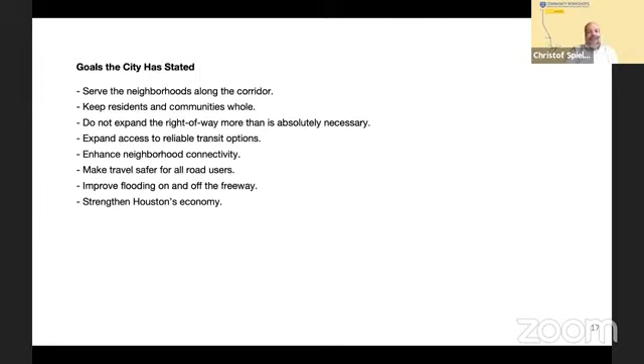The county adopted a very similar set of goals with a resolution at Commissioners Court: enhance walking and biking connections between and within existing communities, improving safety for people in vehicles walking and biking on the facility and connecting streets, reduce historic flooding patterns, aggressively mitigate new flooding impacts, prioritize use of existing right-of-way, mitigate displacing residents and business owners by compensating their properties at fair market value, and help renters with rental relocation assistance. Preserve existing businesses and community resources while enhancing growth and economic development opportunities within neighborhoods adjacent to the project.

Protect and enhance parks, open spaces, and air quality as critical to the physical and mental well-being of individuals, families, and communities. Meet the standards the flood control district has set forth and follow the requirements of Atlas 14. Encourage an engineering design for an innovative multimodal transportation system, and mitigate damage to air quality and alleviate noise pollution as much as possible.

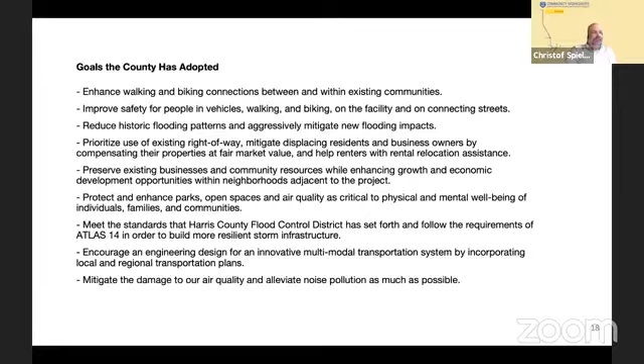Our goal in this entire design effort—in that first round of meetings where we heard concerns and opportunities, in the work our team did to come up with design responses, and in the alternatives we presented to the community in the second round of meetings—was to reduce the negative impacts and increase the benefits of this project.

We've identified a whole series of ways to do that: dedicated two-way transit lanes, frontage roads designed as city streets, safe pedestrian and bike crossings while keeping as many of those crossings as possible, opportunities for freight rail grade separation and relocation, flood mitigation on Halls Bayou and White Oak Bayou, programs for displaced residents to ensure the affordable housing supply is not reduced, and design exceptions to reduce displacement.

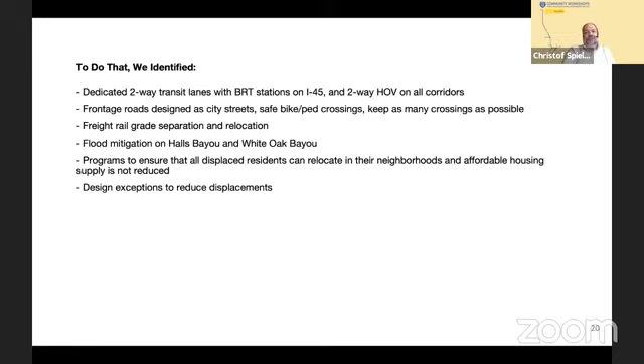Having done all of that, we set out to reduce those impacts and increase those benefits. We concluded that we could not do that simply by refining the project. If you look at the draft environmental impact statement, it stated that all alternatives would cause disproportionate high and adverse impacts to minority or low-income populations, and those are directly a result of the widening of the highway.

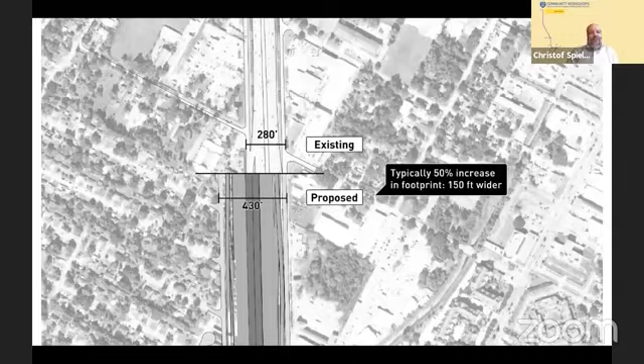This is a project which would significantly widen the freeways that it touches. In segments 1 and 2 north of downtown, there's typically a 50% increase in footprint—that's 150 feet of additional highway width. And that directly leads to significant displacements.

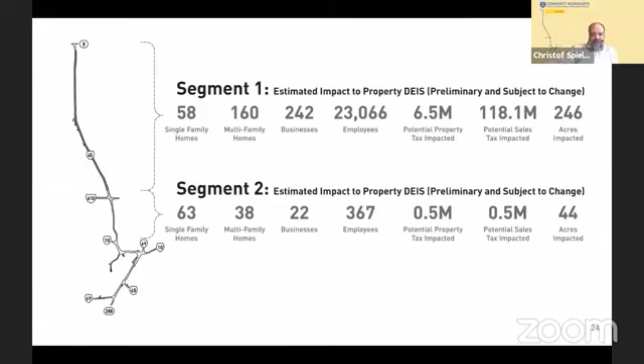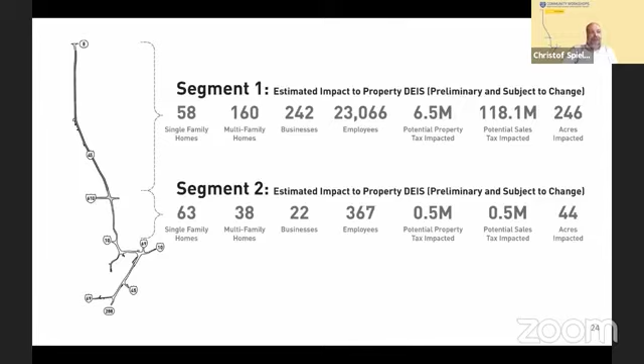These are the DEIS numbers. You can see in segment 1: 58 single family homes, 160 multifamily homes, 242 businesses with a total of 23,000 employees. In segment 2: 63 single family, 38 multifamily, 22 businesses. These are very significant impacts that are due directly to the widening of the highway.

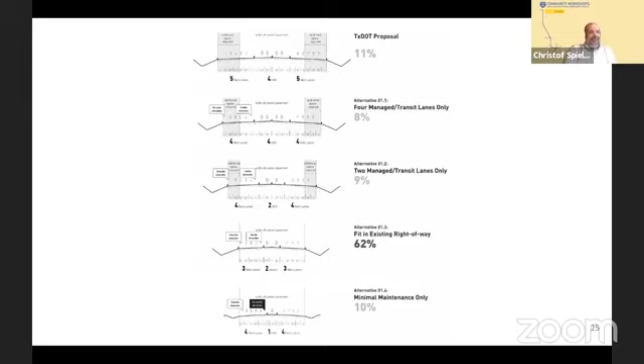In that second round of public meetings, we asked what's your preference for capacity and cross-section. What we heard as an overwhelming response was the public saying they want us to look at alternatives fitting within the existing right-of-way of this highway.

So we looked at multiple options for doing this, and all of them ultimately come down to a trade-off between three significant goals: adding capacity to the highway, bringing the highway up to current design standards, and minimizing displacements and neighborhood impacts.

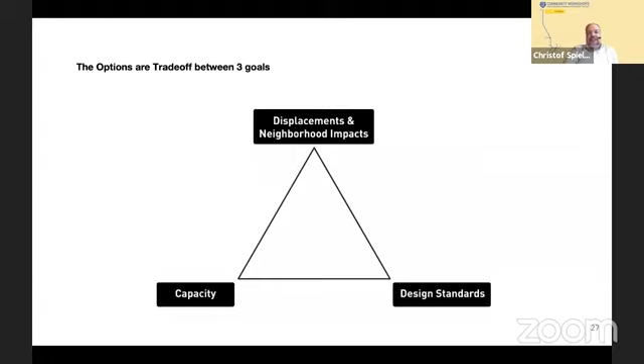If you look at TxDOT's statement of goals, their primary goals are adding capacity and increasing safety, which is taken to mean bringing the project up to current design standards. We came at this saying there is really a third goal here: protecting and enhancing neighborhoods. Based on all of this input, we asked what version of this project does that.

We think there's an alternate vision for segments 1 and 2 that can accomplish all three of these things: increasing the capacity of the highway, increasing safety, and having minimal displacement.

So first of all, how do we increase capacity? First of all, rebuilding interchanges is an increase in capacity. Every time you have a left-hand on or off ramp, every time you have merge lanes which aren't long enough, every one of those serves as a bottleneck on the entire system. So bringing interchanges up to modern standards increases capacity.

Secondly, rebuilding on and off ramps so there are proper merge lanes and good geometry increases capacity. Adding shoulders increases capacity, especially if there's a crash and cars are able to pull over. We know segment 3 serves as a bottleneck for this entire network, so segment 3 can actually help capacity in segments 1 and 2. Adding transit capacity and more transit service adds capacity, and giving more people access to transit adds capacity.

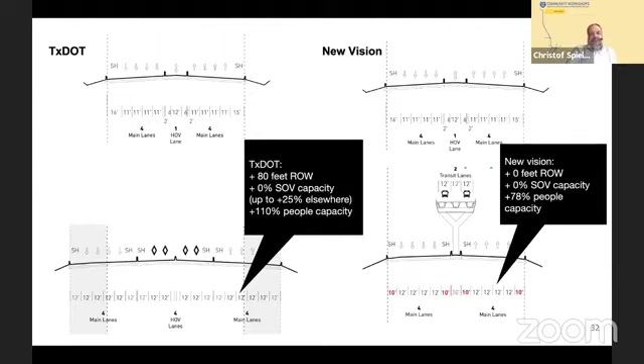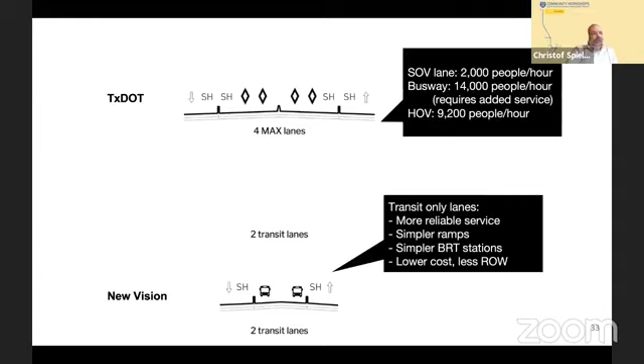Part of that is thinking about those lanes in the middle. We think looking at transit-only lanes, as opposed to HOV lanes or managed lanes, can lead to more reliable transit service and simpler on and off ramps. It makes it simpler to add stations along the way so neighborhoods benefit from that transit, and it can be built at lower cost with less right-of-way.

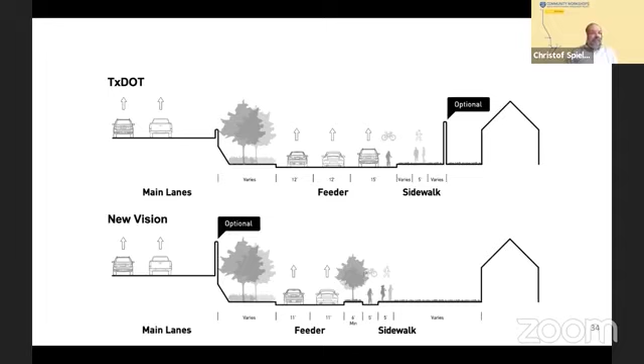But this vision isn't just about what happens with the highway main lanes, it's also what happens next to the highway. We said the frontage roads along I-45 should be seen as parts of the neighborhood rather than parts of the freeway. That means they're designed to city street standards, not highway standards, that they have safe pedestrian and bike facilities, not bike lanes shared with cars, that they have more extensive landscaping, and even that sound walls are located next to the main lanes and between the main lanes and the frontage roads rather than between frontage roads and houses, which clearly makes those frontage roads part of the neighborhood and means fewer gaps in those sound walls, making them more effective.

And so that is the vision that the mayor's letter puts forward: keep the current number of main lanes in segments 1 and 2, replace the current reversible HOV lane with two-way transit lanes, add intermediate BRT stations so neighborhoods along the way benefit from that new transit service and so local bus routes can connect to that BRT, bring exits and interchanges up to design standards, provide full inside and outside shoulders, and have the frontage roads typically be two lanes designed as city streets.

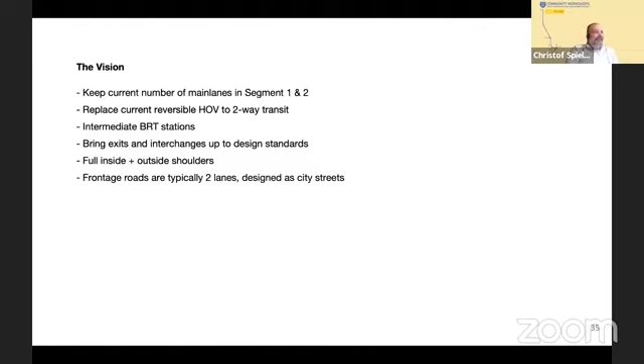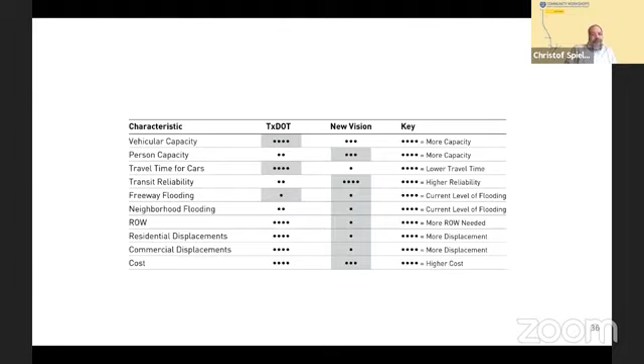So looking at that vision, how does that compare? Ultimately, it does not provide the same vehicular capacity that the TxDOT design does, but ultimately can provide more person capacity. With less vehicular capacity, it may not do as much in terms of travel time for cars, but it does more for transit reliability.

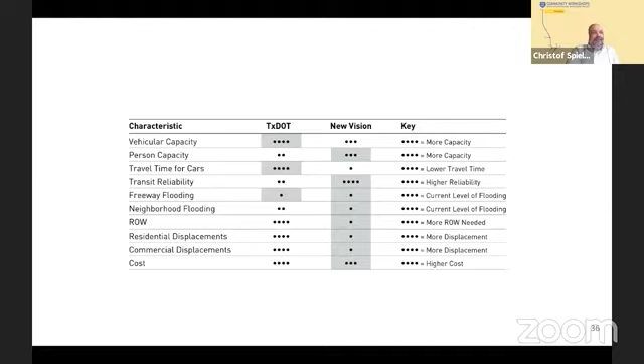Both versions can really address the freeway flooding. We think ultimately widening the freeway less and incorporating more flood control features as part of the highway can mean we reduce neighborhood flooding as well. And clearly, this alternate vision uses less right-of-way, fewer residential displacements, fewer commercial displacements, and ultimately would be a less expensive project to build. If we look at the goals TxDOT started with, we'd argue this actually addresses those goals, though sometimes in different ways.

When we're adding capacity, if we think of capacity in person capacity rather than vehicle capacity, this is actually a way to add capacity. So we think this alternate vision is a project which would be a significant improvement over the current highway, as well as an improvement over what TxDOT has proposed.

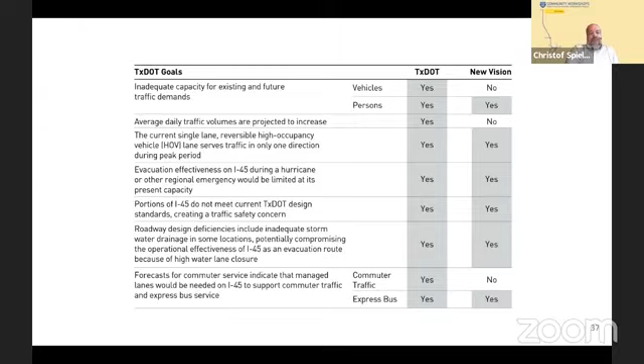All of that leads to the mayor's letter. On May 12th, the mayor sent a letter to the Texas Department of Transportation laying out what I just laid out. Got a response from TxDOT, from Laura Ryan at the Texas Transportation Commission, within 8 days. And then notably, the county chimed in and Commissioners Court passed a resolution saying they agree with the requests made in the mayor's letter.

That letter includes general statements. It includes specific improvements in segments 3. And in segments 1 and 2, it includes a request for a study of an alternate lane configuration, as well as specific improvements. What's in this letter is directly based on what we heard from you.

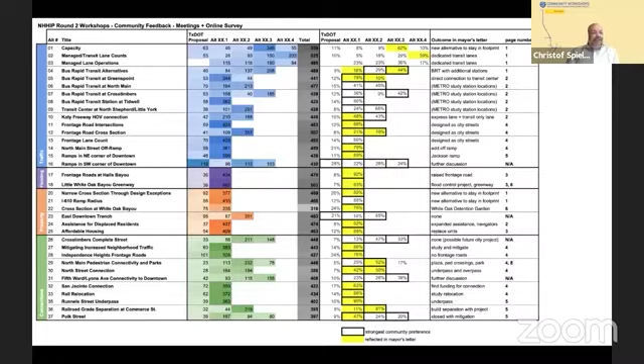For example, you'll see item number 16. We did not get a clear, resounding direction either way, and so some of those need more work. But overall, we were able to take what the public said and say, this becomes the city's vision.

So, general statements: this project should be part of a regional strategy for freight movement that supports the regional economy while minimizing impacts on neighborhoods. Freight is an important part of what this highway does, and we think this should fit into a larger strategy.

This project must leave residents and communities whole. That means ensuring all displaced residents can relocate in their neighborhoods and affordable housing supply is not reduced. That last point is critically important.

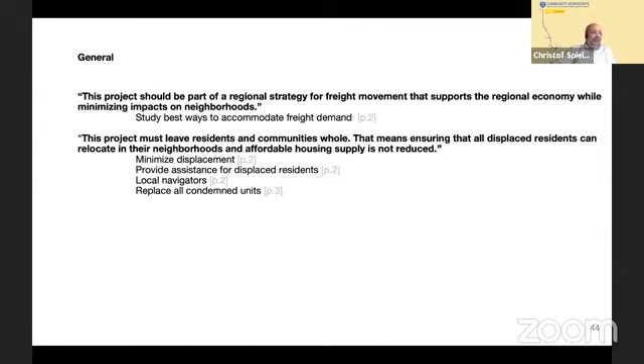This isn't just about making sure that displaced residents have a place to move to. This is making sure that the supply of affordable housing in the neighborhood surrounding the freeway isn't decreased, because if it is, everybody in those neighborhoods suffers from less supply.

This project must not only reduce the incidence of flooding on the freeway, but also reduce the flood risk in the surrounding neighborhoods. There has been some very good work on this by the Flood Control District working with TxDOT.

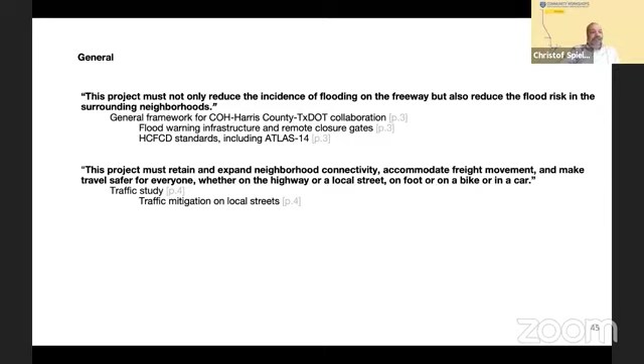This project must retain and expand neighborhood connectivity, accommodate freight movement, and make travel safer for everyone, whether on a highway or a local street, on foot, on a bike, or in a car. This is a transportation project for everyone that affects every mode of transportation.

The project should minimize impacts on parks, facilitate the creation of new green space, and the design of the project should recognize the history and character of the surrounding neighborhoods.

We should find every way we can to reduce and mitigate the significant air quality impacts that highways have regionally and on the neighborhoods surrounding them.

And design coordination statements: the city asked for design-bid-build on segments 1 and 2 to enable more control over the details of the design, continued coordination between the city, Metro, management districts, and a series of asks about construction.

This is a project that will be under construction for over 10 years, and so what life in the city is like during construction is also essentially important here.

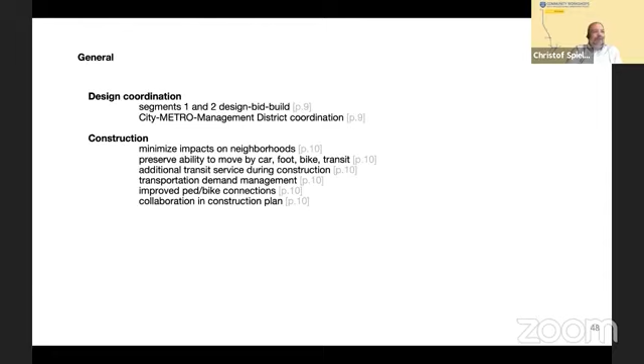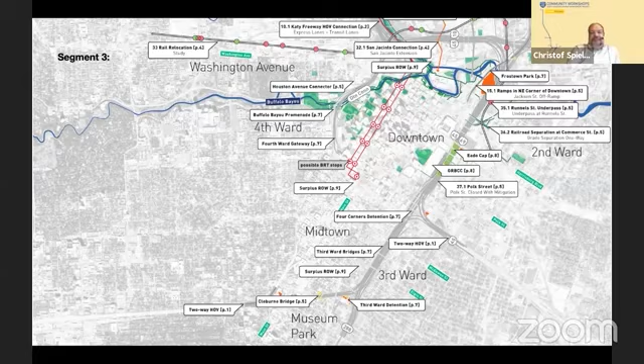We then had a series of specific design proposals starting in segment 3: two-way HOV on the Southwest Freeway, a better bridge for Cleburne, better design for detention in the 3rd Ward, improved bridges in the 3rd Ward, two-way HOV on the Gulf Freeway, mitigation for the closure of Polk, a cap park in Eado, accommodating railroad grade separation at Commerce Street, an underpass for Runnels, better ramp configuration in the northeast corner of downtown, better exits to the 5th Ward, a connection for San Jacinto, and the Katy Freeway HOV connection.

There are still unresolved issues here. We think that at White Oak Bayou, where there are significant impacts on the White Oak Bayou Greenway, there are design refinements which are possible, and we've been working through those.

And on the southwest corner of downtown, the ramps, as currently designed by TxDOT, do not work well for Metro, and we want to see what the alternatives might be there.

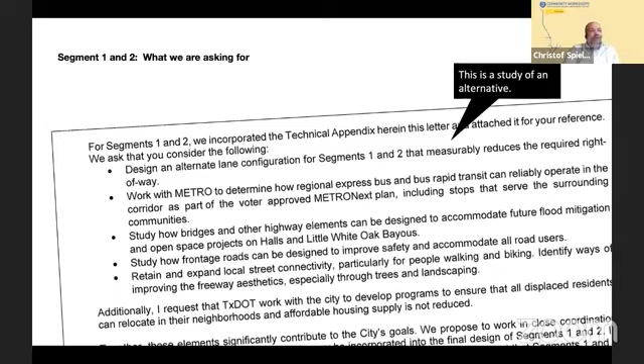In segments 1 and 2, what the letter asks for is the study of an alternative. In other words, the city and the county are not saying we know the right answer for 1 and 2. What the city and county are saying is we believe there is an alternate approach for 1 and 2, and we would like a process to study those approaches.

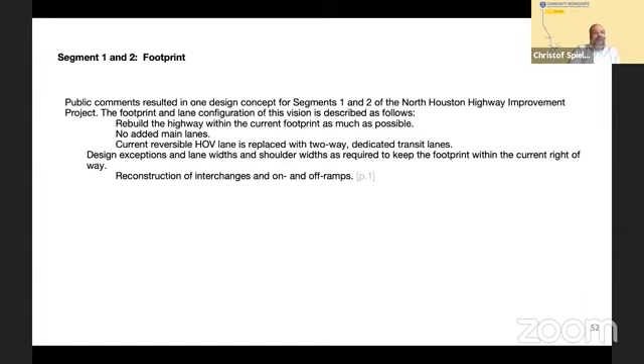That would be an alternative to rebuild the highway within the current footprint as much as possible, with no added main lanes, replacing the current reversible HOV with two-way dedicated transit lanes, design exceptions for lane widths and shoulder widths as required to keep the footprint within the current right-of-way, and reconstruction of interchanges and on and off ramps.

And so that sets up a study, and that study would include a confirmation of goals. We want to start this by making sure we're all agreed upon what our goals are, the development of a new alternative along with any other alternatives that TxDOT may identify, and traffic modeling for the new alternative with agreement on the parameters for that traffic modeling.

As we've discussed already, we think we know what an alternative like this might look like, but we believe there is detailed design necessary in order to get to that point.

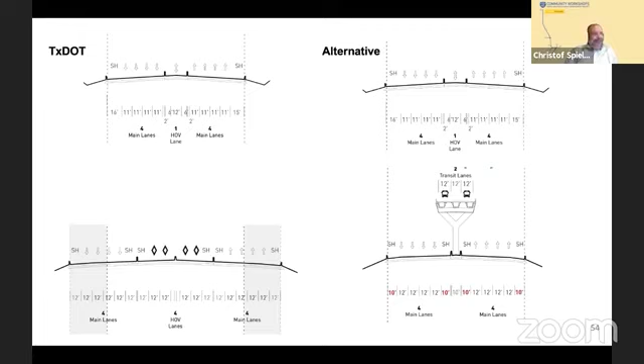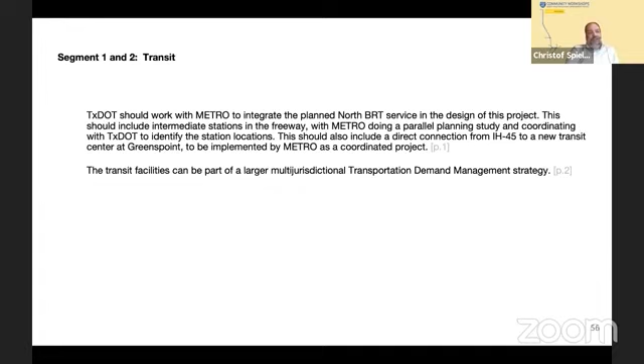This project should expand transit options. That means two-way all-day transit service, and we believe that's best done with dedicated transit lanes that can be used by the BRT as well as regional express service. That means that this BRT should be incorporated in the design of the project, and it should include intermediate stations, with Metro doing a planning study to identify the correct locations for those stations.

Ultimately what this project should enable is a bus rapid transit line that runs from downtown via North Shepherd and Greenspoint to Intercontinental Airport, a much improved version of the current 102 bus. And we think that there are locations for additional stops along the way, which could serve the surrounding neighborhoods and connect to the local bus network.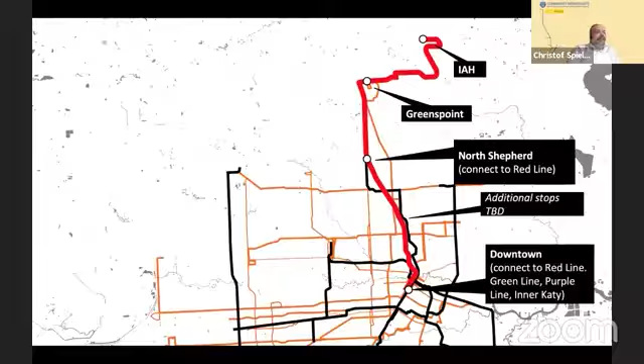What might this look like? What might these transit lanes look like? On the downtown end, we think these lanes would have ramps directly into downtown streets, leading into bus lanes on those streets.

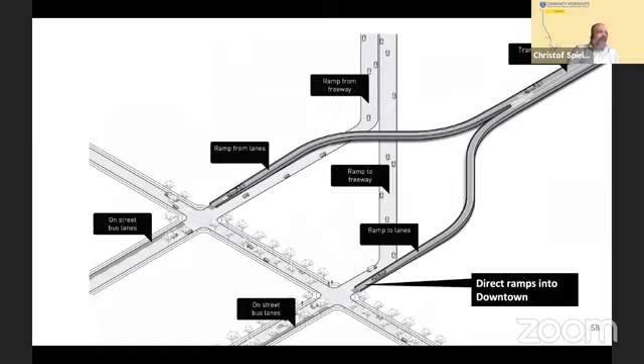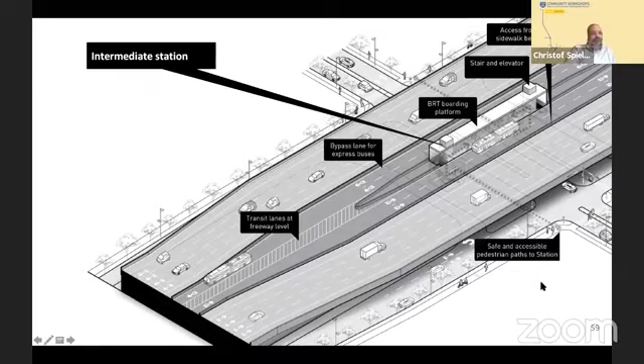Then on the freeway, a series of intermediate stations. Here you can see what one of those BRT stations might look like. You can see it has 4 lanes next to it. It has inside lanes where the BRT can stop. It has outside lanes where park and ride buses, regional express buses can bypass. And then there's stairs and elevators from the BRT platform directly down to the streets below.

Here's what that might look like on a section of elevated lane. Once again, connections to the street and those lanes that allow multiple vehicles to go through there. One of the real benefits of transit-only lanes is these stations are much simpler, and the people waiting here do not have a stream of carpools and other vehicles passing by them as they are waiting for the bus.

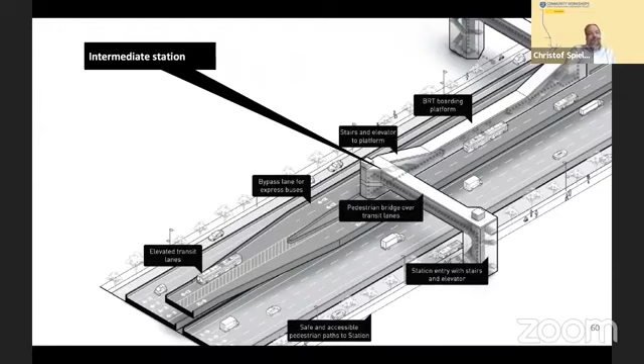And then finally, at the north end of the project, those lanes would lead to a direct ramp to Greenspoint Transit Center, which would be a hub for North Houston.

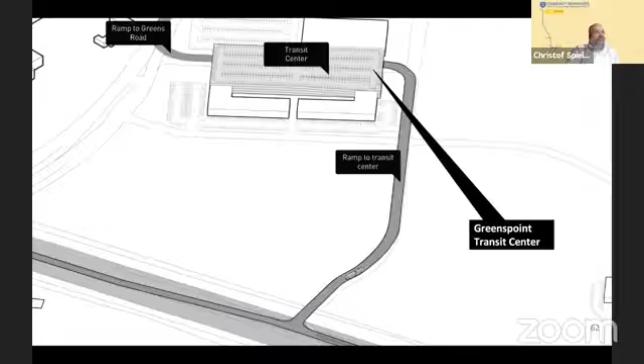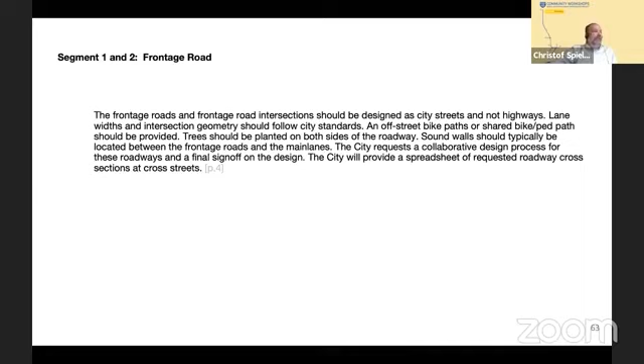The frontage roads and frontage road intersections should be designed as city streets and not highways, following city standards with an off-street bike path or shared pedestrian bike path provided.

So I've already mentioned this. I think we really want to see this cross-section look very different. And critically, we want to see the intersections look very different. These intersections are major safety issues. And so we want them to have safe bike and pedestrian crossings and intersections designed for moderate design speeds so that cars are not speeding around these intersections.

And we want these crossings to be good. We want the experience of walking under this highway or biking under this highway to be a good experience.

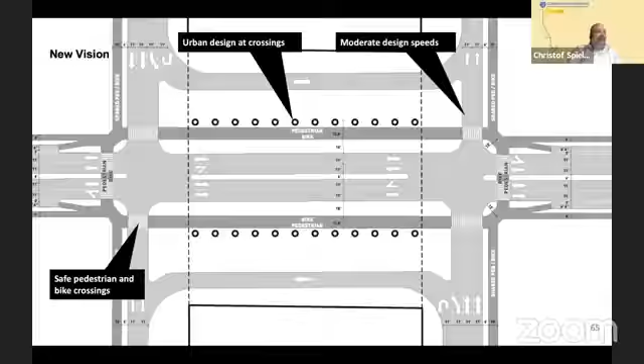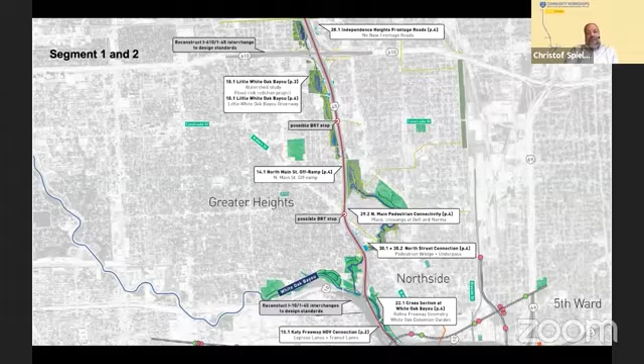Then in segments 1 and 2, in addition to those general requests, a series of specific ones: trim down the cross section at White Oak Bayou, a pedestrian connection at North Street, a better crossing at North Main, an off-ramp added for North Main, a whole project along Little White Oak Bayou which would combine the freeway project with a flood control project to significantly reduce flood risk in the surrounding neighborhoods, and using whatever land needs to be acquired for flood risk to create a new greenway and hike and bike connection through these neighborhoods. No new frontage roads in Independence Heights, where there are no frontage roads today.

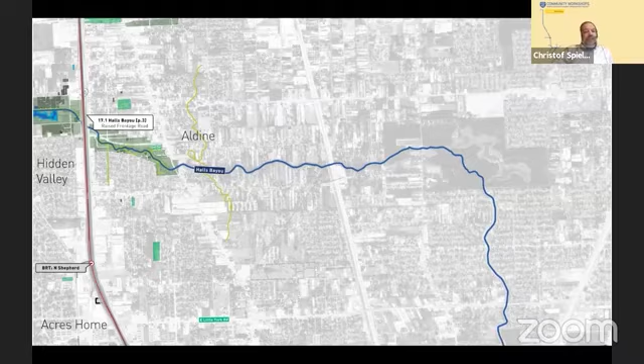And then going further north, continuing along White Oak Bayou, and along Halls Bayou, we heard a lot about local flooding here, elevating the frontage road high enough so that it is not regularly closed by flooding, and also creating a greenway along Halls Bayou under here. And finally, on the north end, the BRT connection to Greenspoint.

So why do we think it's important to look at additional designs in segments 1 and 2? Why do we think it is worth reconsidering this part of the project? A couple of reasons. First of all, this project has significant impacts on low-income Black and Hispanic neighborhoods.

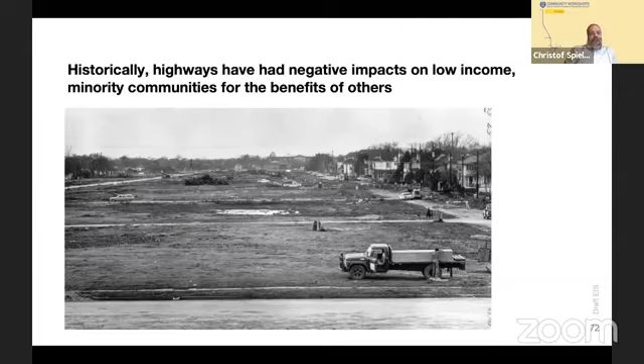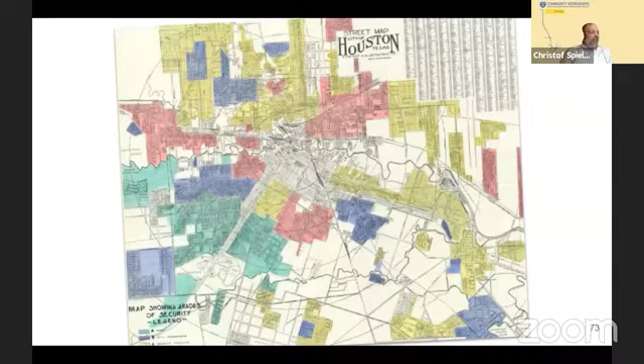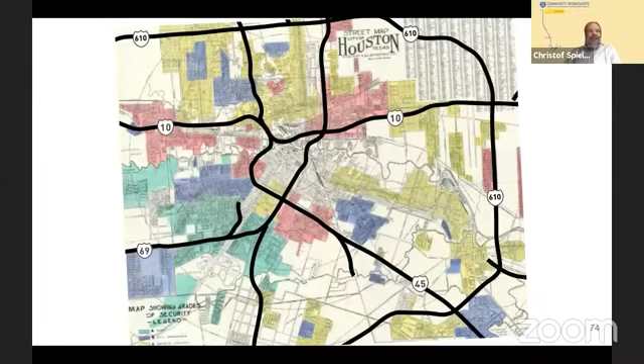And in that way, it builds on a long history. Historically, the highways built in Houston, like across much of the United States, have had negative impacts on low-income minority communities for the benefit of others. If you look at the historical patterns of segregation, if you look at the historical redlining maps, you will notice the degree to which these highways were planned through Black and Hispanic neighborhoods when they were first built.

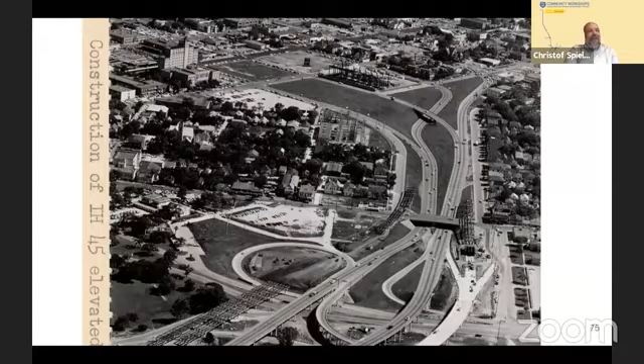And we can look in Houston at the impacts those had. This is I-45 being built through the 4th Ward, Freedmen's Town. On the left, you can see the commercial part of the neighborhood. On the right, you can see the residential part, and you can see how the highway was bulldozed right through the middle of it. Not only did this highway take out a significant swath of the neighborhood, it transformed everything around it. Within a short period of time, that commercial heart of the neighborhood was entirely gone, replaced by an expansion of downtown, as this highway literally cut those commercial businesses off from the neighborhood they belonged to.

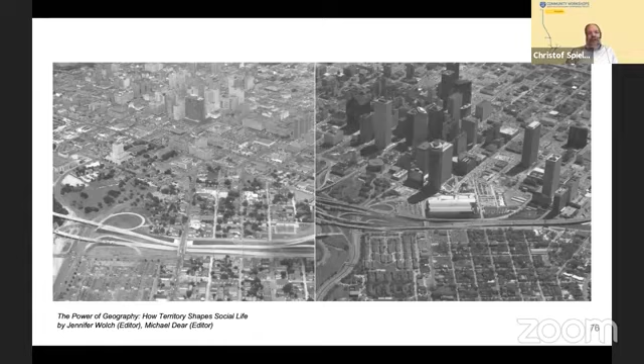And all of this happened in an era where not only was there no kind of environmental regulations around highways, but we didn't even have the Voting Rights Act in place. This was a period in which these neighborhoods literally did not have a voice in this. And you can see what happened.

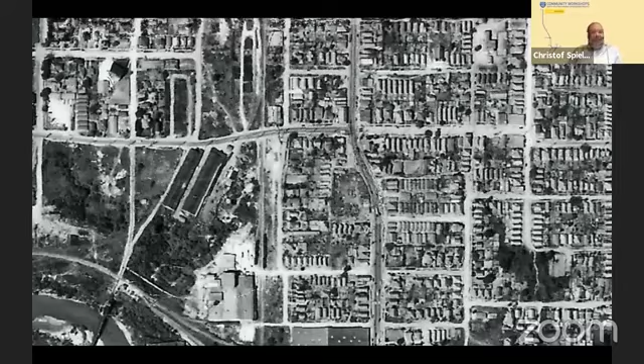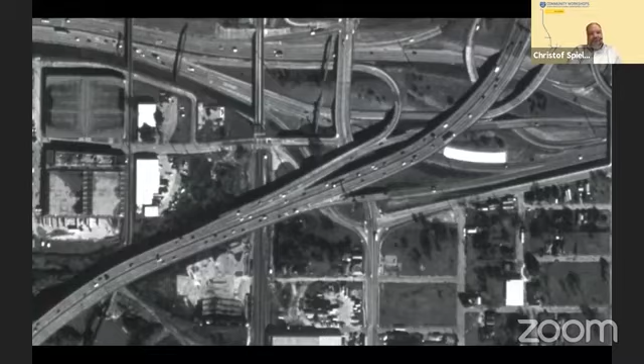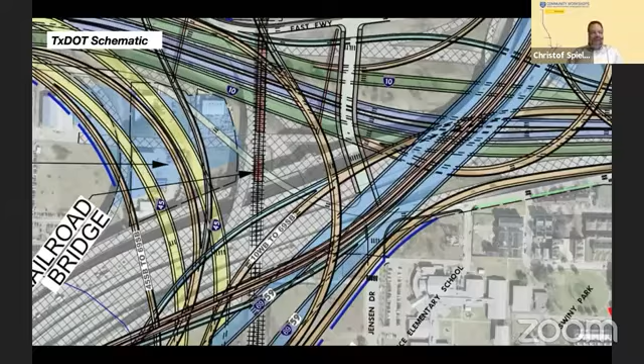What we note when we look at the analysis of this project is that this really was not taken into account. All of the alternatives in segment 2, which did not add lanes, were eliminated at a point in the process before community impacts were even evaluated. By the time the evaluation criteria considered displacements, all of the narrower versions of this project were already eliminated. And in that first screening, there is only one case where right-of-way was considered, which is right around the North Main Cavalcade area, which also happens to be the richest and whitest segment of segments 1 and 2.

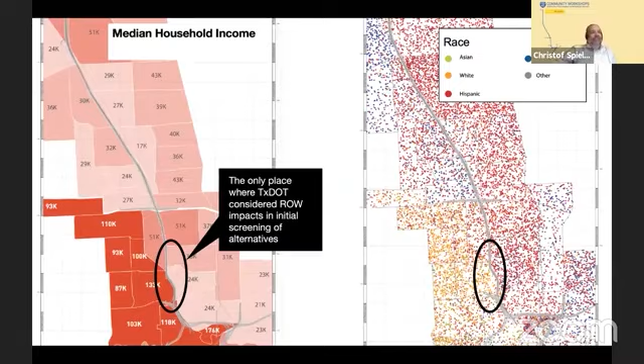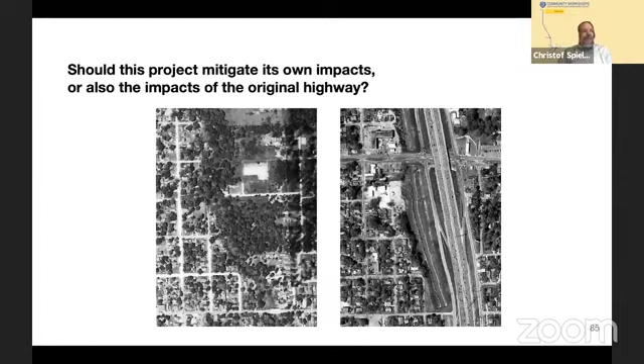It's a basic question here. Is it acceptable to have negative impacts on low-income minority communities so that others can have a better commute? Should this project mitigate its own impacts, or also the impacts of the original highway? Do we take past injustice as a baseline, or do we try to remedy that?

Secondly, traffic projections have not matched forecasts. If you look at the traffic report this project was based on in 2014, looking at 2011 traffic numbers, the projections in that report have not held up. Traffic has actually gone down rather than increased. So one of the basic statements this project is based on has not actually held up.

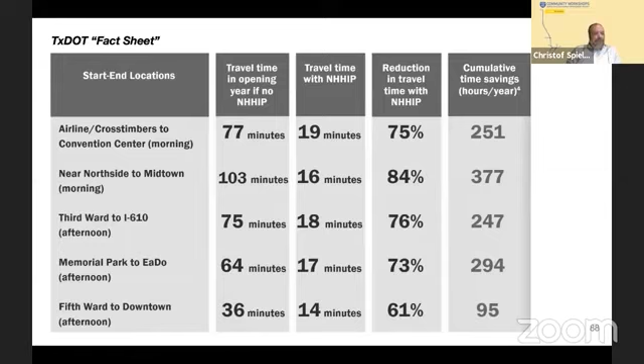You can look at projections for future travel time here. See that the project is projecting a significant increase in travel time if the current highway stays. We don't know that that matches up with what's actually happening.

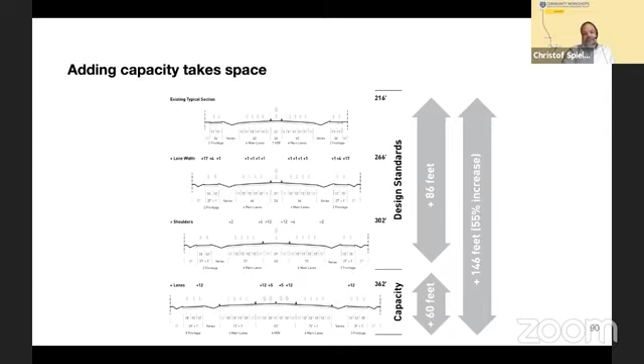We need to consider impacts on local traffic. This project does things like remove the North Main off-ramp, which means people have to drive an additional 1.7 miles on surface streets. We need to understand the impacts this project has on local traffic, because simply making freeway traffic better doesn't do any good if neighborhood traffic gets worse.

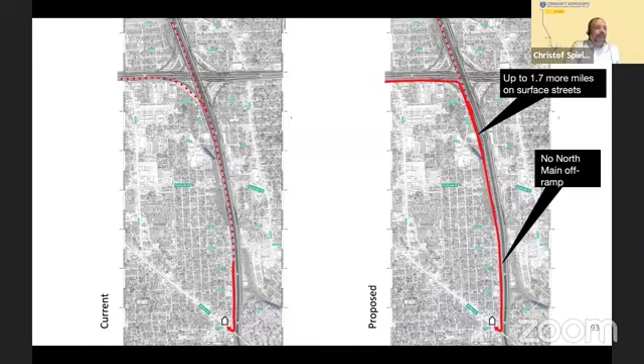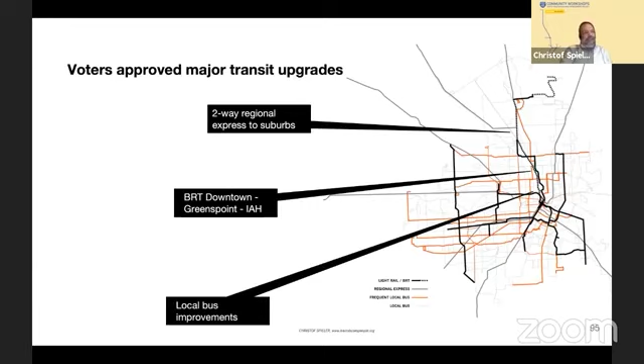We need to take advantage of the Metro Next transit improvements. Voters approved local bus improvements, BRT, and two-way regional express bus service. The potential of none of that was considered in developing these alternatives. And we know we can reduce impacts through design standards. Now, this stuff matters.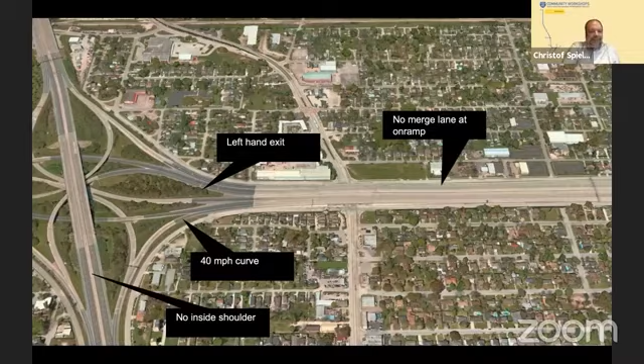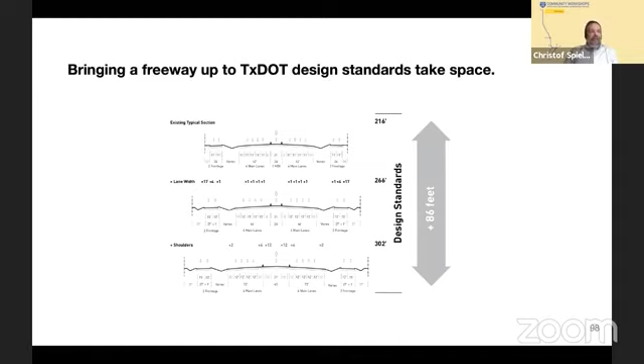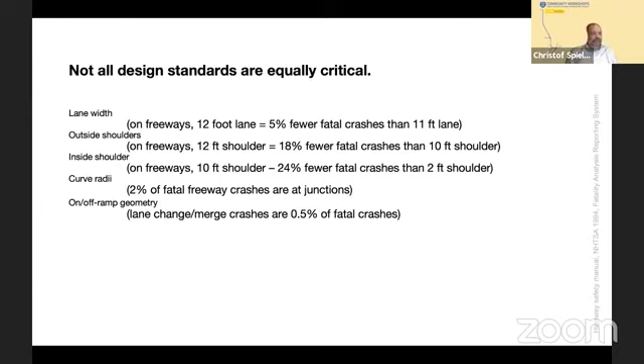Not having a merge lane matters. Left-hand exits matter. 40 miles per hour curves matter. Not having an inside shoulder makes a freeway less safe. But we think we really have to consider each of these, because bringing a freeway up to design standards also has significant displacement impacts. And we know different design standards, different aspects of this, don't all matter the same. So we think this also needs to be considered.

We need to understand freight movement. The traffic studies for this project were really based on the movements of single occupant vehicles, but freight isn't going to the same places people are. And so if we really want to build a project which will improve freight movement, we have to understand freight movement.

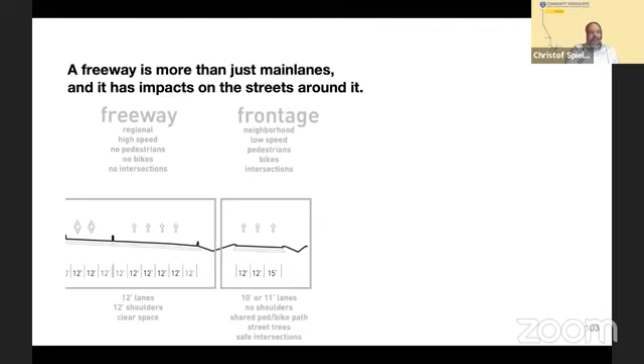We need to consider safety for everyone. It's not just about the main lanes. It's about the frontage roads, and it's about all of that local traffic. If we look at crash data right now, you'll notice there's crash hotspots along the frontage roads on this project. This project done badly can actually make the streets of Houston less safe.

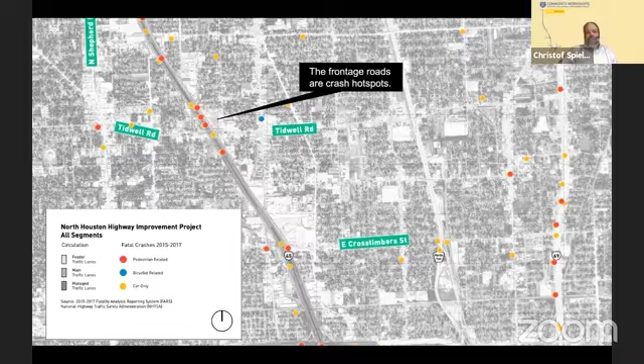So what are next steps on this? The city and the county have made this request, and the result of that was a vote at H-GAC on July 24th. That happened in the Transportation Policy Council, a regional body for the 8-county region, 29 members, including cities, counties, Metro, TxDOT, which must approve all federal transportation funding.

And when the city of Houston presented its request, the TPC then had 2 items on this project. One was an improvement of funding for segment 3, and the second was creating a working group for a memorandum of understanding. Here you can see the members of that working group.

And over 5 meetings, that work group has developed and reviewed an MOU. It includes background, purpose, scope of work, agency commitments. The idea of this MOU is to create a process for working through these requests we've just talked about, to create a process for studying an alternate vision for this highway.

And there will be a virtual public meeting this Thursday about that MOU. Having a good MOU in place is a way of ensuring this discussion we just had moves forward, of ensuring that the things the public requested get considered.

And with that, we're happy to answer any questions that have turned up in the chat. I'm seeing if we have any. I am not seeing any questions right now, but we will be happy to continue answering questions later.

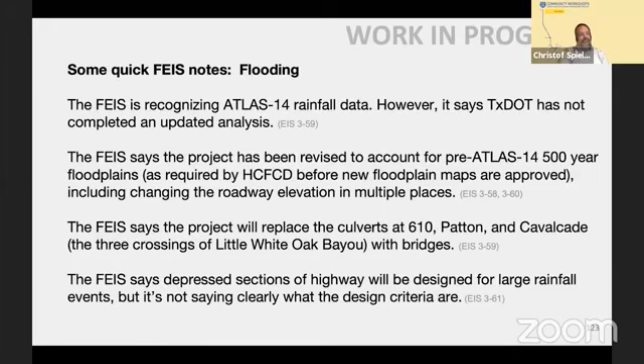On environment, there is a commitment to a weatherization and energy efficiency service program. There's also a commitment to an air monitoring program during construction, longitudinal tining on pavement because that makes less noise than transverse tining, and a general commitment to sound walls.

Most of the discussion we saw in the DEIS about climate change is no longer in this document. Most of that section is gone, including a specific analysis of the alternatives, as well as a discussion of how climate change might impact the project itself. The FEIS says that regional emissions will go down regardless of what happens with this project, and also says that while there may be local increases in pollution, there is no way to analyze those increases, so they are not documented.

The FEIS acknowledges visual impacts on Bayou Greenways. There's a whole appendix on visual impacts, but it says these are not designated parkland and does not propose any substantive mitigation for that. There is some mention of small improvements, but nothing major there.

The FEIS does not include a traffic study for impacts on local streets. There is nothing in this document to document how changing on and off ramp locations, widening the highway, rebuilding these roads, rebuilding these frontage roads would change local traffic.

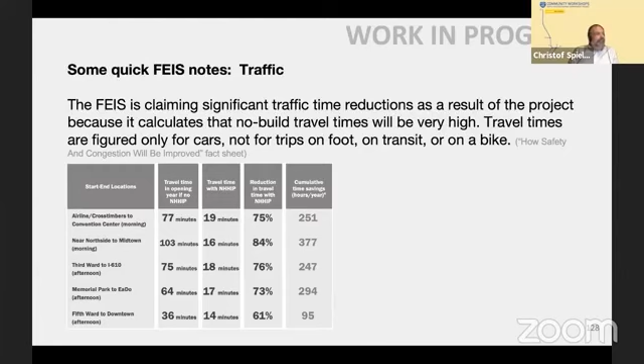In the fact sheets that TxDOT has put out, it notes significant travel time reductions. Those significant travel time reductions are the result of projecting very high travel times in the opening year if this project isn't built, like saying that if we don't build this project, it will take 103 minutes to get from the near north side to Midtown, which is a trip you can make in 16 minutes on light rail today. And it does not analyze trips on foot, on transit, or on bikes.

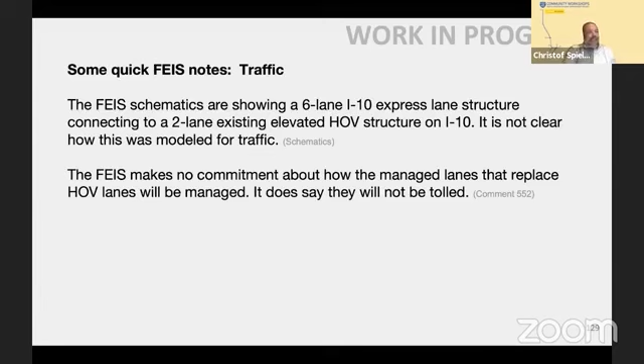The FEIS schematics are showing a 6-lane elevated I-10 express lane structure, which then connects in midair to an existing 2-lane elevated structure, which would involve 3 lanes of traffic merging down to 1. It's not clear how that was modeled for traffic. There is no commitment in here on how the managed lanes will be managed. On I-10, for example, carpool restrictions as well as tolls are used to make sure that the traffic in those managed lanes keeps flowing and that bus service remains reliable. This document says that the new managed lanes on 45 will not be tolled, but it doesn't make any commitment to how they would be managed or how the speed of those lanes would be maintained.

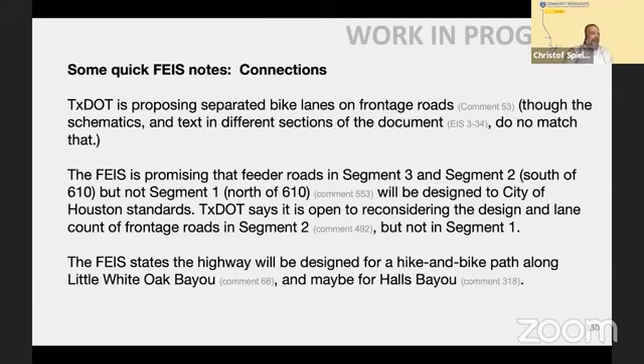In terms of connections, there is a proposal for separated bike lanes on frontage roads, but the schematics do not show that, and the text in different sections of the document do not match. The FEIS is proposing that feeder roads in segments 3 and 2, in other words everything south of 610, will be designed to City of Houston standards, and that TxDOT is open to reconsidering the design and lane count of frontage roads. But everything north of 610 in segment 1 would not be reconsidered and would be designed to standard TxDOT standards, and that the highway will be designed for a hike and bike path along Little White Oak and Maybe Halls. It does not propose any new connection to mitigate the removal of the North Street overpass.

It commits to a new bike lane to replace the bike lane currently on Polk, which would be demolished as part of this project, but states that the new southbound frontage road behind the George R. Brown mitigates the impacts on vehicular traffic.

There is no mention of the impacts on buses. It says that Rothwell will replace Nance as the connection from the warehouse district to Jensen, but Rothwell is shown as a one-way street versus Nance being a two-way street.

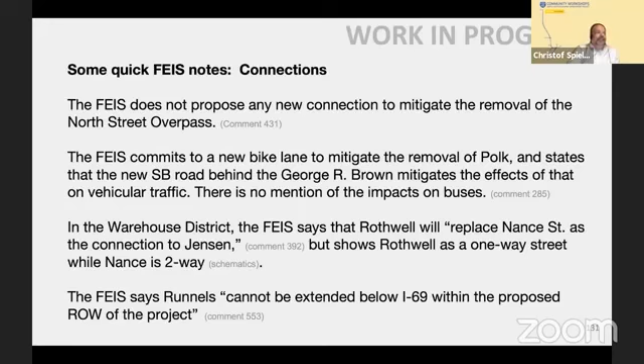It also says that Runnels cannot be extended within the proposed right-of-way of the project, which would mean a current connection being lost. It says the project will accommodate the San Jacinto underpass, which has been a long-time City of Houston request, but notably it does not show San Jacinto Street actually being extended to maintain the connection from San Jacinto Street to I-10.

It says the project will accommodate the Navigation Commerce underpass. The FEIS states that segment 3 would not permanently affect bus service, even though there are over a dozen bus routes operating on ramps or streets that would be eliminated as a result of the project, as shown in the schematics.

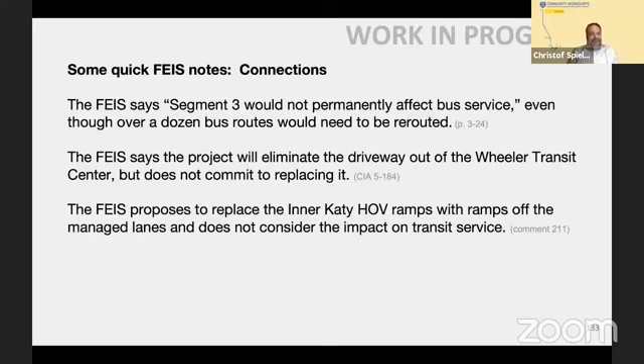The FEIS says this project will eliminate the exit driveway from the Wheeler Transit Center, meaning buses would literally not be able to leave the transit center, but does not commit to replacing that driveway. And the FEIS proposes to replace the current Inner Katy HOV with ramps off of the managed lanes, and does not consider whether removing a barrier-separated HOV ramp and replacing it with striped ramps on managed lanes would impact transit service.

So with that, question and answer. A couple of questions here, going back through. If it is documented in written reports that TxDOT hasn't adequately addressed public concerns, will the ROD be denied?

TxDOT self-certifies its ROD, so TxDOT is required to produce a complete and accurate document and shouldn't be certifying a ROD unless it is. There are also federal agencies that have the opportunity to intervene, and obviously, legally, lawsuits can be brought against a project as well.

Were your proposals modeled similarly? We're asking for modeling on alternative proposals for segments 1 and 2.

How can I, as an individual, help convince TxDOT of the alternative you've laid out? Talk to TxDOT, but also importantly, talk to elected officials. Ultimately, TxDOT works for us.

When I clicked on the TxDOT website, it brought up some white papers that could not be readable. Okay, so question from Mary Schultz: the full FEIS is on TxDOT's website. If you're having technical problems with this, contact TxDOT, because that should be working.

Is segment 3 going to be design, bid, build? Segment 3 is going to be in pieces, but most of those pieces will be design build, though one segment will be design bid build.